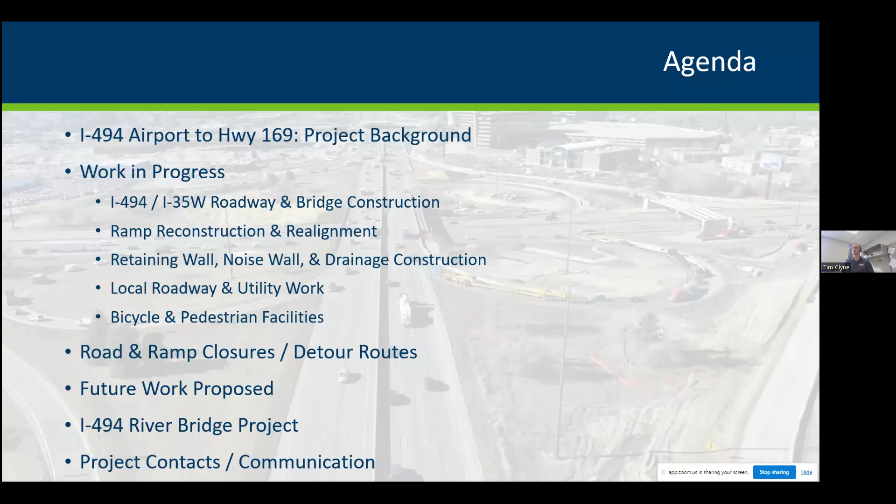Over the course of several years, after a lot of study, we've put together what's called the 494 Airport to 169 full vision. The ultimate vision, what we would like the corridor to look like, is basically to reconstruct or add an additional E-ZPass lane all the way from 169 to the MSP airport. That's about a 6-mile stretch, maybe a little more, 6 or 8 miles from 169 all the way to the airport.

The 35W interchange at 494 is one of the busiest, if not the busiest interchange in the entire state. It sees a lot of freight and commuter traffic, and it needs some improvements to help traffic flow better. And then there's access consolidation between 35W and 77.

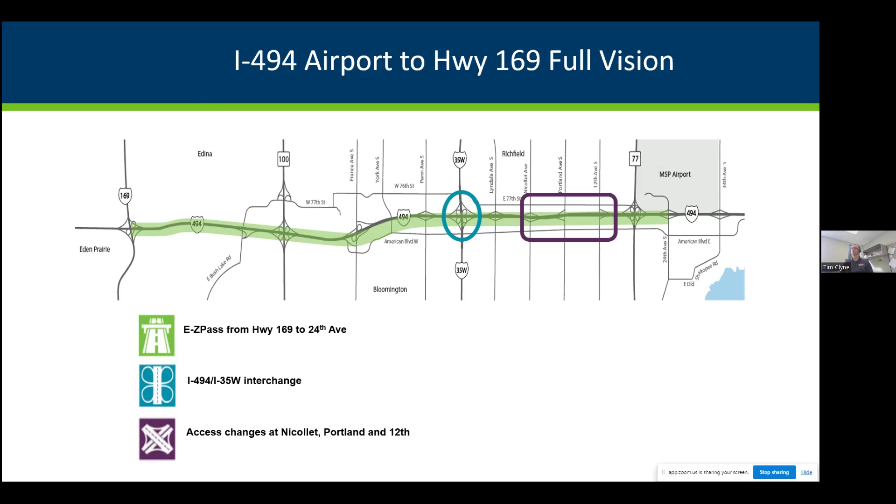So you can see that's a very large project. It's big. We can't do the whole thing in just one single project, so we're breaking it up into smaller chunks. The current project is by far the largest chunk of that full vision that we're going to do, but we're calling it the 494 design build. That's just the contracting method that we use to build the project.

So the scope and the schedule, what we're planning on doing - we started the project last year already, in the spring of 2023.

From now through the fall of 2025, the goal is to build the E-ZPass lane with full reconstruction from just west of Highway 100 to the 35W interchange. That's basically a 3-year process to rebuild the main line there.

Also in that same timeframe is to reconstruct the interchange at 35W and 494. And also this year, in 2024, we are building a pedestrian bridge at Chicago Avenue that crosses 494 and allows access for the communities on both sides of the interstate.

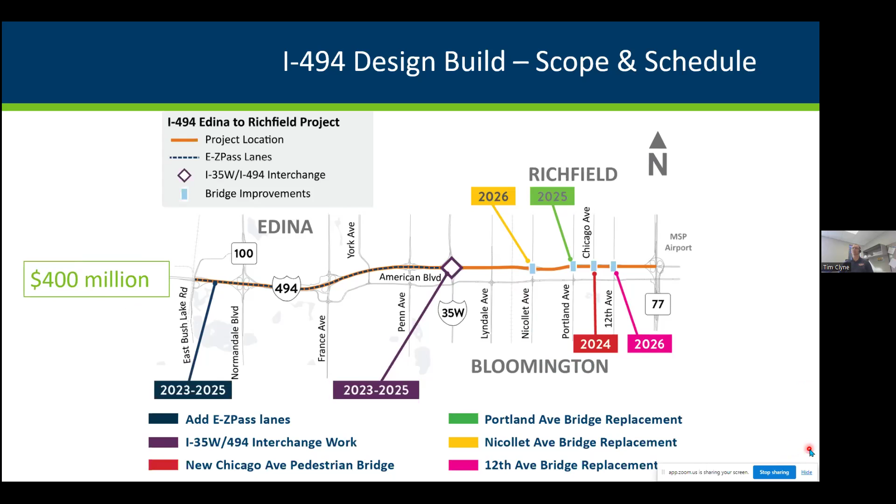The major benefit of this project, and really of the full vision, is twofold. At the top is improving safety and improving traffic flow, or reducing congestion. There are a lot of ramps merging and traffic merging on and off the freeway, so if we can consolidate or reconfigure the interchange geometry in some places, that will help traffic flow a lot smoother, which in turn improves safety.

Also, our interstate system is about 60 years old. It was built in the late 50s, early 60s, and roads and bridges just get tired and need some rework to get a smooth road surface again, as well as improved drainage. The drainage system has been improved over time, but we still get significant rain events and can have flooding on I-494, which is generally not a good thing. We don't like to close the interstate when it floods. So we're going to improve that.

And there is also, especially on the east side, east of 35W, but the west side as well, a lot of improved bike and pedestrian facilities to improve accessibility.

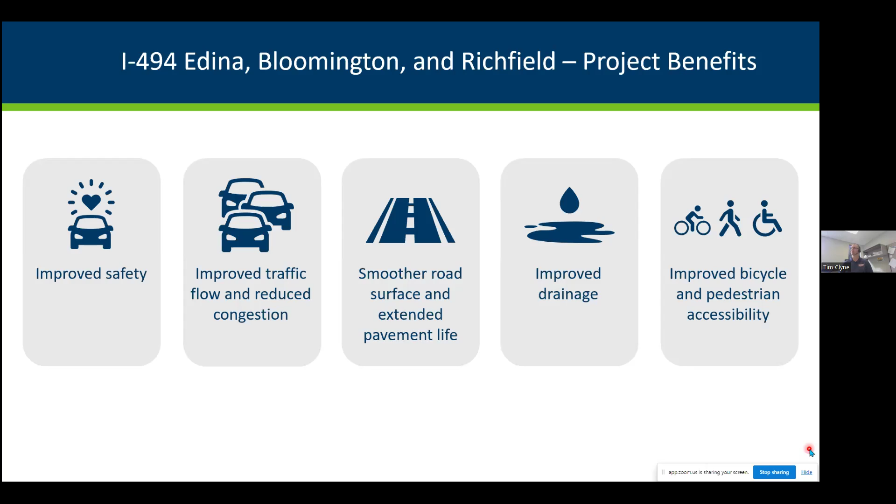One of the centerpieces of the project is the turbine ramp at 35W. Right now, pre-project, you have the entrance loop to northbound 35W, as well as the exit loop to go westbound on 494, and there's also the entrance ramp from 82nd Street. That's a lot of traffic all jockeying for the same position, and there's a lot of merging and congestion that happens.

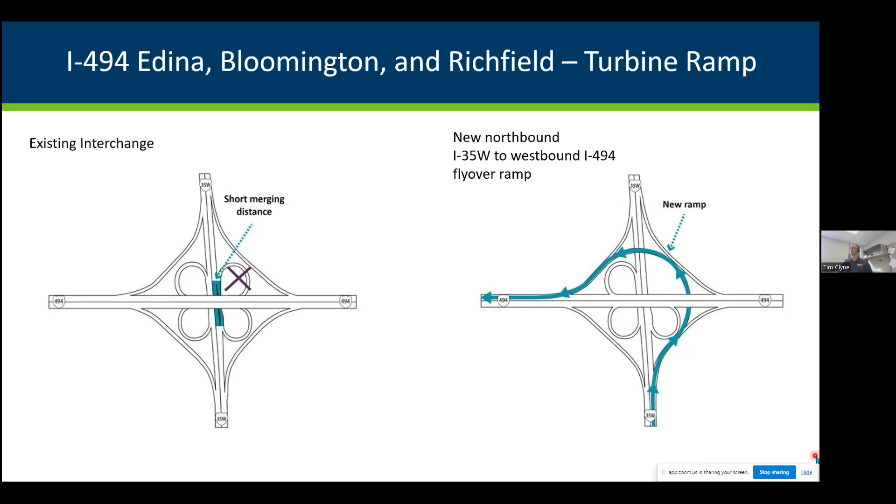We are eliminating this loop ramp here and instead building what's called a turbine ramp—call it a flyover. It's basically a more circular shape. Northbound traffic wanting to go westbound on 494—this is the heaviest movement of that whole interchange—so we're building a separate ramp. It goes underneath 494 through here, then climbs up and over this new bridge we finished earlier this spring, comes around, and eventually merges onto westbound 494. That's one of the highlights of this project that's underway.

So I'll start with some fun facts. I'm a numbers guy, I'm an engineer, I like numbers. So just kind of the project by the numbers.

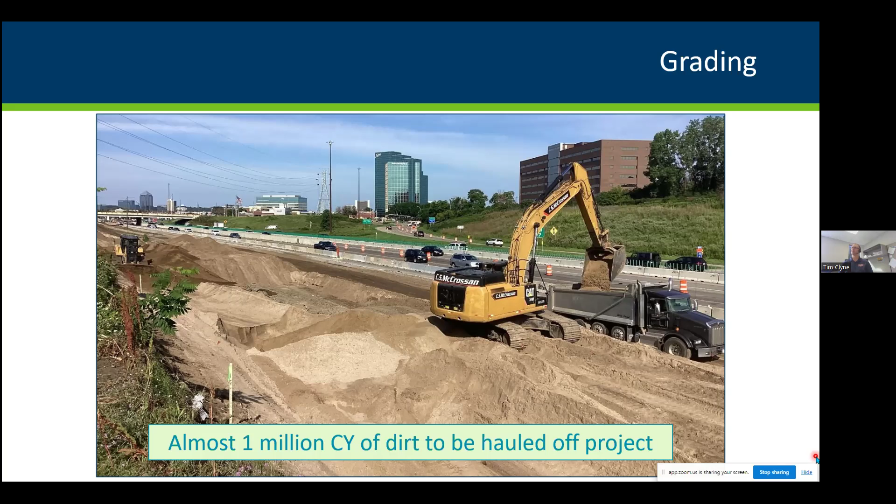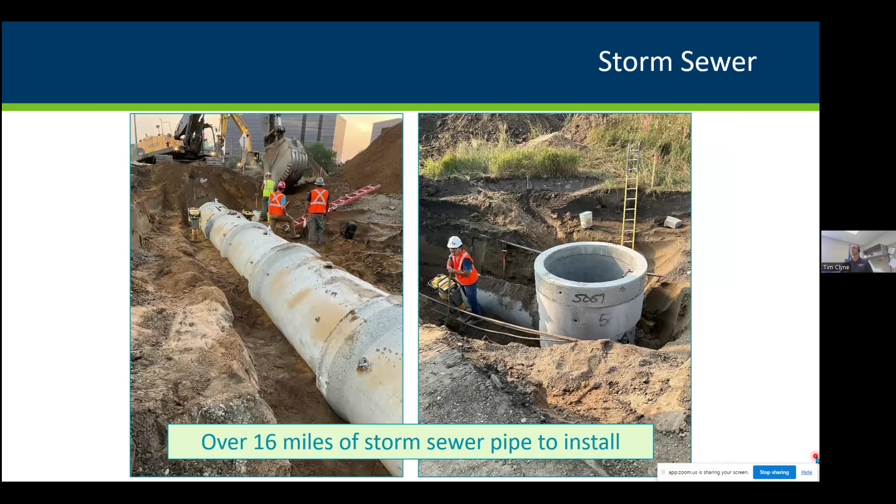If you've driven through the project, there's a lot of dirt to move—almost 1 million cubic yards of dirt that need to be scooped up, put into trucks, and hauled off the project and disposed of elsewhere. We are installing over 16 miles of storm sewer pipe throughout the project to alleviate flooding issues, along with all the catch basins and things that go along with it.

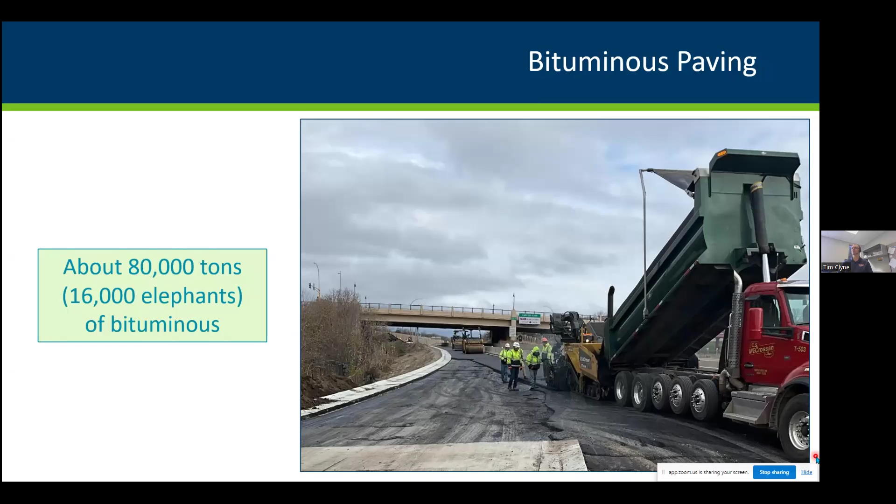There's about 80,000 tons of asphalt paving to do on the job. Some of it's temporary, just to move traffic, widening and crossovers, things like that. Some of it is permanent asphalt paving. That's about the weight of 16,000 elephants or so—just a fun way to think about how much asphalt is coming on the job.

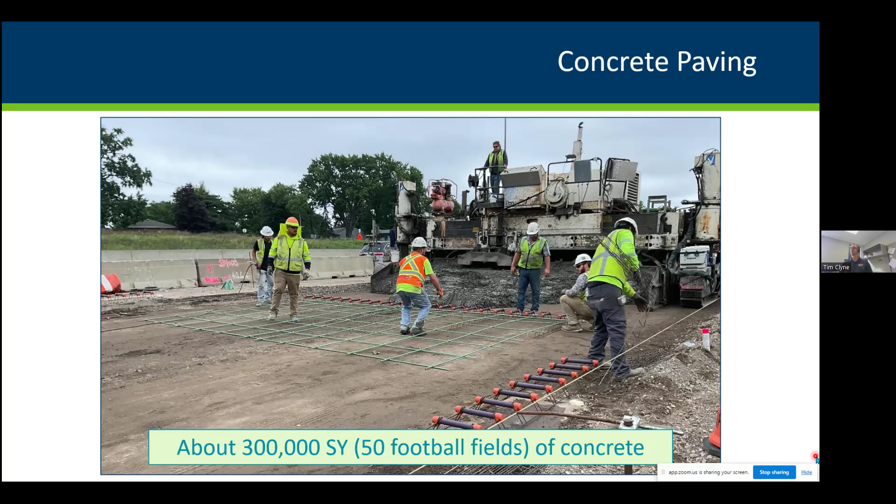Similarly, we have about 300,000 square yards of concrete paving on the job, basically all of Interstate 494. The new pavement will all be concrete. That's the equivalent of paving 50 NFL football fields with concrete. It's a lot of concrete work coming on the job.

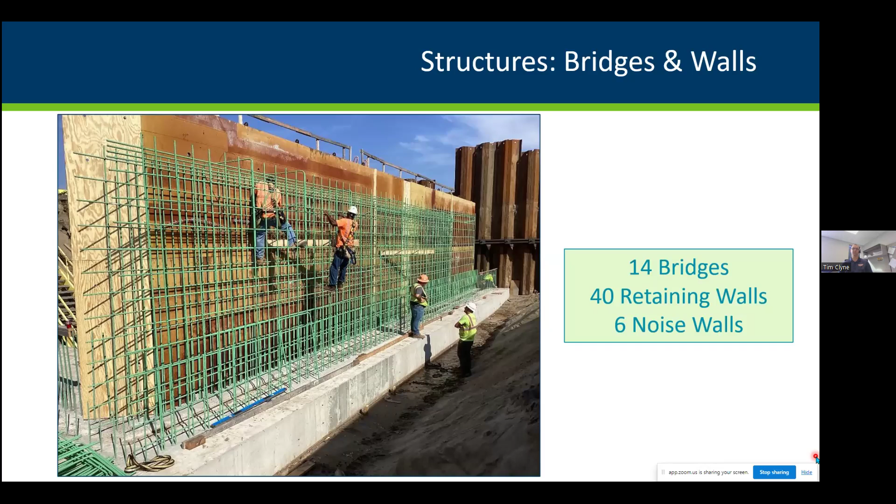So now I'll transition into showing you a view from above. We have drone photography that we take on the project about once a week or so. We actually took new drone footage yesterday, but I didn't get those photos in here yet, so these pictures are all from last week, pretty fresh. I'll generally start way on the west end and work my way east.

First picture starting west of Highway 100, you can see last year we reconstructed and paved this, eastbound, coming into the bottom of the screen here. That's complete, and we just recently paved westbound 494 between 100 and East Bush Lake Road up here.

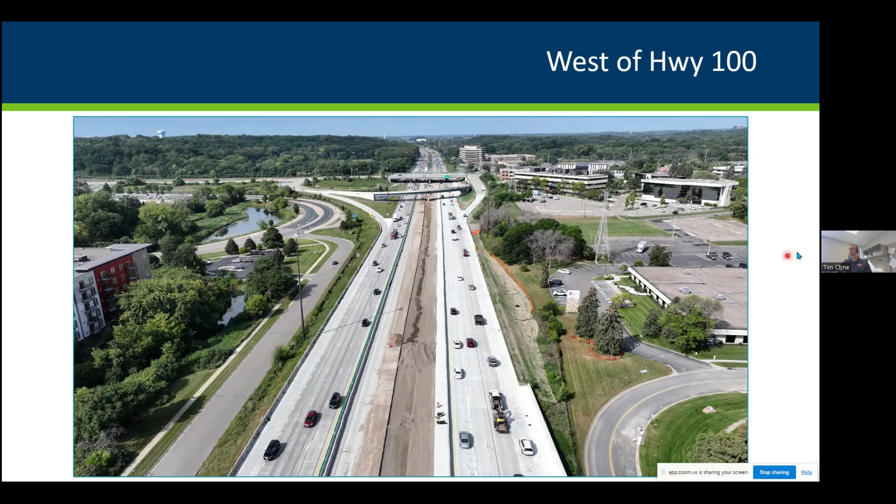Crews are currently finishing up grading in the median here. We have all the traffic pushed to the outside, so we're cleaning things up to get that ready to pave in the next month or so. Concrete median barrier will go in, drainage, overhead sign structures, things like that. That work is progressing and should be on track to be done later this fall.

Turning the other way from Highway 100, now looking east, so the top of the screen is east, west is at the bottom here. This year we are reconstructing pretty much all of 494 eastbound from Highway 100 to 35W.

This is American Boulevard, a local road that runs the whole length of the job, but specifically between 100 and France has been closed for a good majority of the season. We recently opened that up a couple weeks ago to two-way traffic.

We still have drainage work that we're completing on 494, and getting the grade ready to do some paving here either later this month or into early October. That work is still ongoing, and we had about 3,000 feet of retaining wall that we had to take out in order to widen the road to add the EZ pass lane.

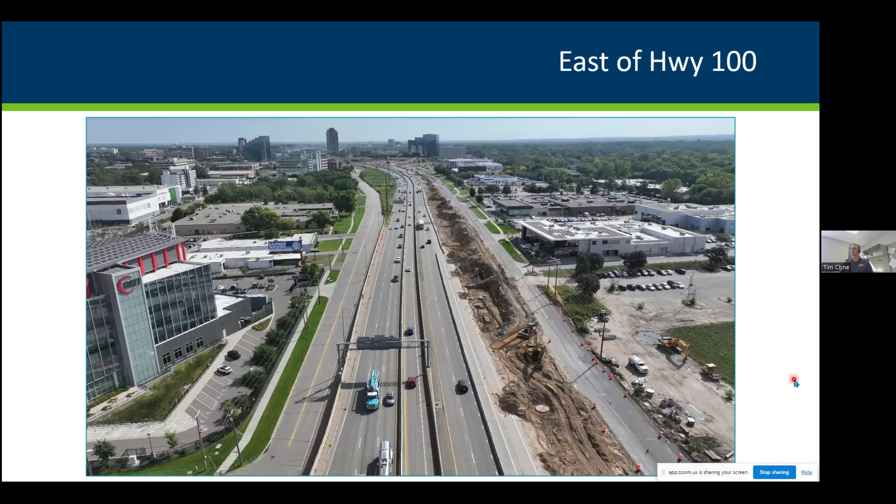Similar shot from the southeast corner of Highway 100, looking again at American Boulevard here and where it intersects with Normandale Service Road, the frontage road. In the past, this Normandale service road was the through movement. Now we've reconfigured the intersection so that American Boulevard is the through movement. If you want to take the frontage road, you'll have to turn onto this.

We have the northbound Highway 100 to eastbound 494 ramp closed right now while we reconstruct that. Doing grading, drainage work is just about there. We're getting ready to build this barrier system, like a retaining wall, to replace the retaining wall that we took out earlier this year.

There have been a lot of local businesses along American Boulevard inconvenienced by the road work, Cyrus Rugs in particular, but also a Mercedes dealer, several other car dealers, an Olive Garden, and apartment buildings as well. But we got traffic open again to try and restore business access for those folks.

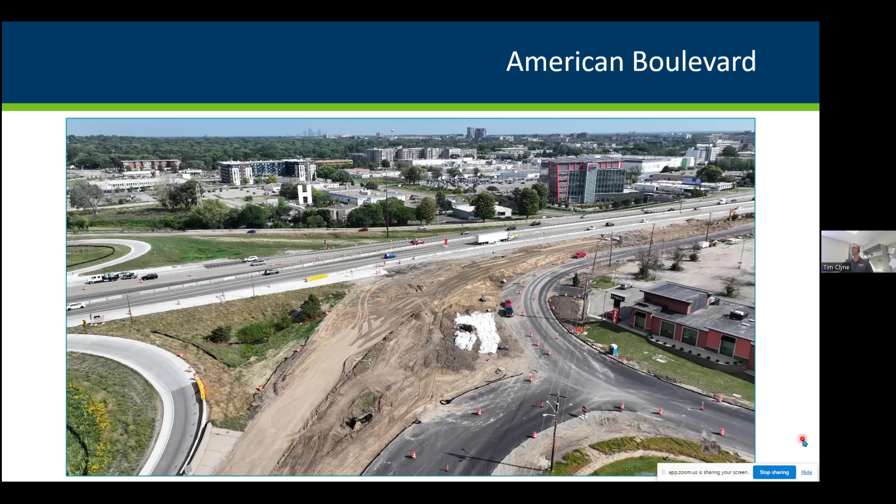Moving a little bit farther east, this corner here at the bottom right of the screen is American Boulevard where it turns up to France. This is the eastbound exit to France Avenue, and that's under construction right now.

We're just about ready to start building a retaining wall here. You can see some pipe laying on the ground getting ready to be installed. And this area here, you may have seen the large piles of sand and rock and this plant. All of the concrete pavement we're paving on this job is being produced at that plant right on site, which certainly helps with truck times and access to get that concrete material, the mixture, to the job site quickly.

This used to be a mound in the middle of the on-loop here, and we dug it down. It will now be a stormwater pond, so that work is in progress and the pond is just about ready. We're getting ready to start putting the road back together. Drainage is just about in, so we're putting sand and then gravel, getting ready to pave this stretch in the next couple of weeks.

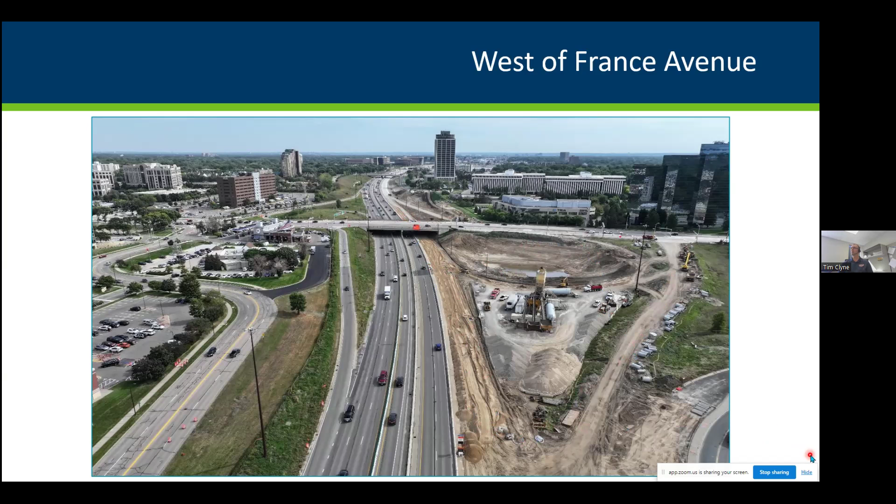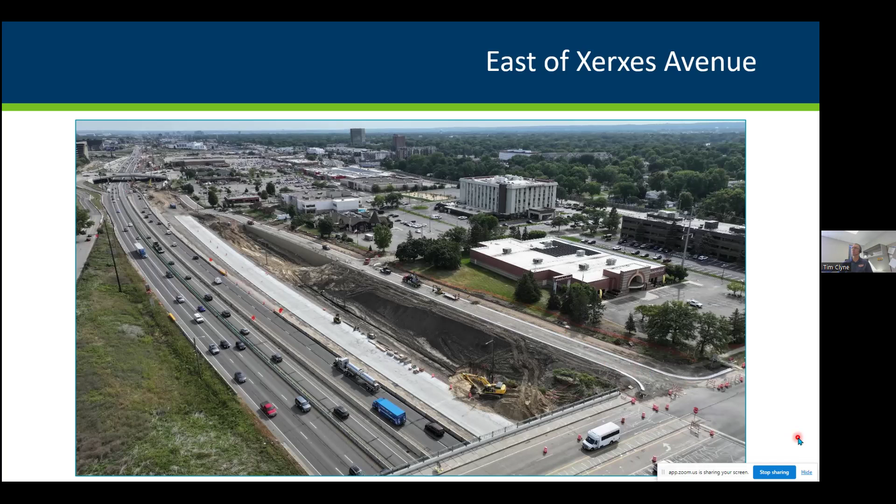Further east, looking at Penn Avenue now, continuing to look east. You can see there's another retaining wall that we built here on the south side of this exit ramp to Penn.

We are just about to kick off some significant work underneath the Penn Avenue Bridge. We've had a long history of groundwater problems, which has caused pavement failures and things. So there's a pretty robust solution there, but we're basically building a land bridge to carry 494 traffic underneath Penn Avenue. That work will be kicking off even later today or maybe tomorrow.

We also just yesterday set up traffic control to do some rehab work on the Penn Avenue Bridge itself. The bridge is only about 20 years old, built in the early 2000s, but needs some small concrete patches on the deck, and the sidewalks on either side will be redone as part of the project here. So that work is ongoing.

Just a little bit farther east, the on-ramp to eastbound 494 has been closed for most of the season here. We have fenced off here a deep drainage structure. Like I said, there's a lot of drainage, deep groundwater. We have a pump house or a lift station here that takes care of a lot of stormwater.

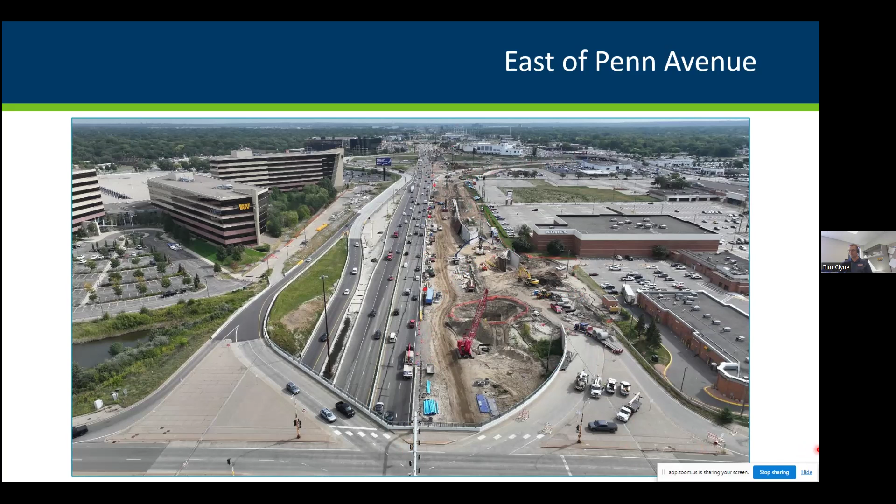Similar picture of the same area, just flipped around looking the other way. So here's Penn Avenue, here's the bridge that I was talking about, and we have retaining walls coming off of the bridge. You can see this is kind of the end of the turbine ramp that I'll show in the next couple of slides. We have a staging area, just places to lay down all the equipment and materials that we're going to use on the project.

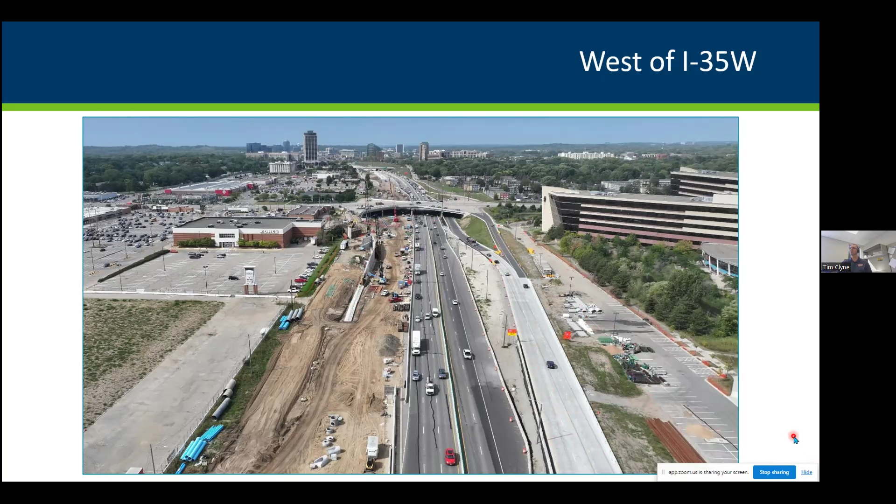This is a new bridge carrying 494 across 35W. We built the abutments on either side, built the pier earlier this year. We closed 35W overnight for a couple of nights to set beams across, and now we are just about ready to pour concrete on the bridge deck itself tomorrow night, Wednesday night.

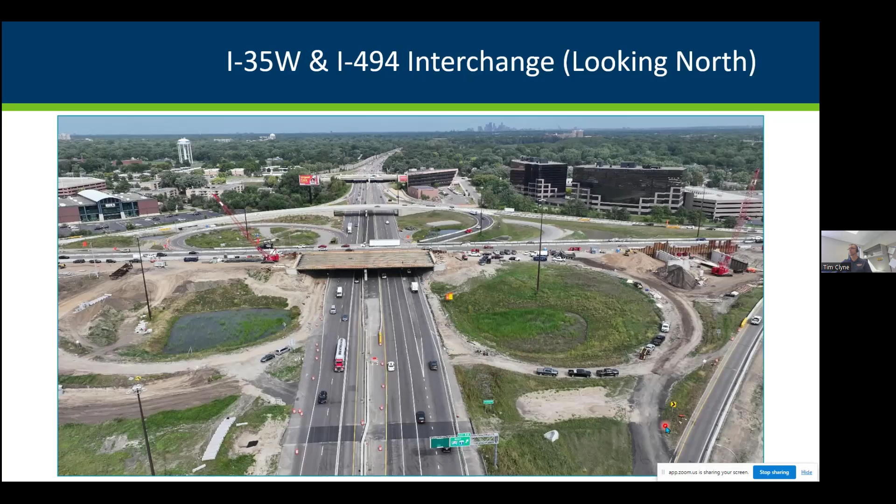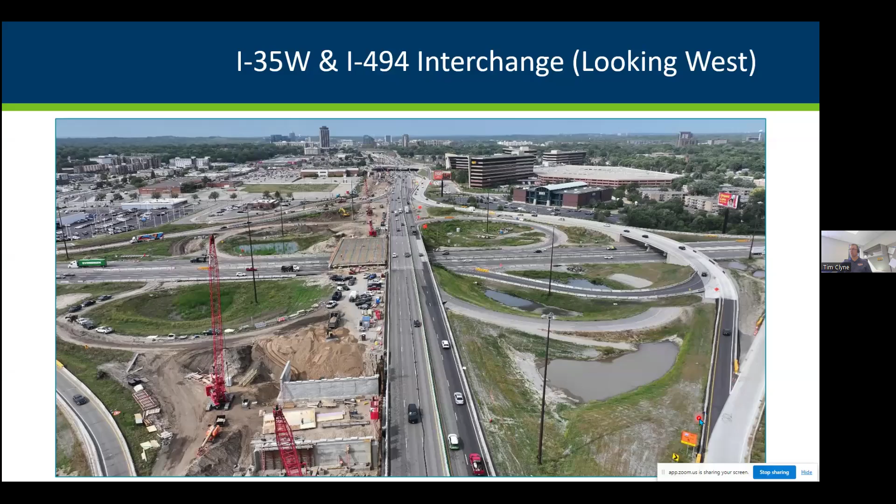So, traffic coming northbound on 35W is coming down to the bottom of the screen. Instead of taking the loop that used to be here, right now we have this temporary S ramp where you can get up onto the bridge and then merge onto 494 on the west side of the interchange.

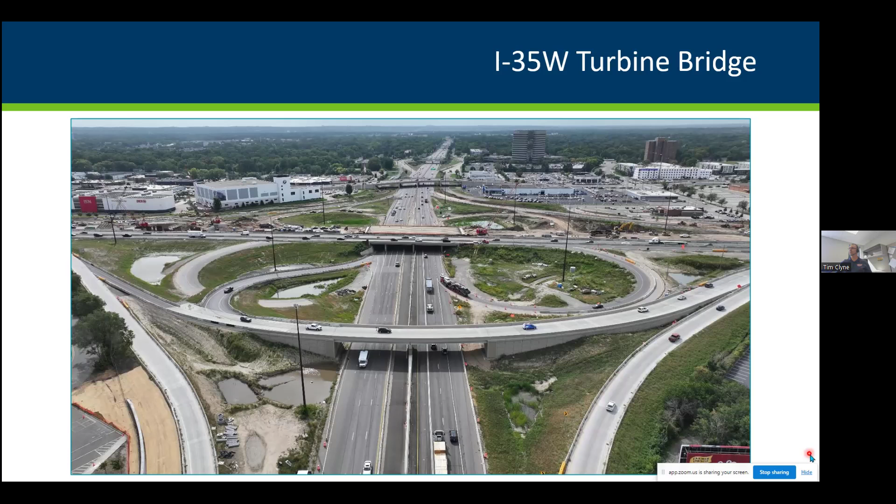Eventually traffic will exit 35W back here. It will go underneath 494 at this bridge I showed in the last slide, and then start to climb up and over and take this bridge across. Again, that eliminates all the weaving between these two ramps and gets traffic to flow a lot more smoothly, and a lot safer in the meantime.

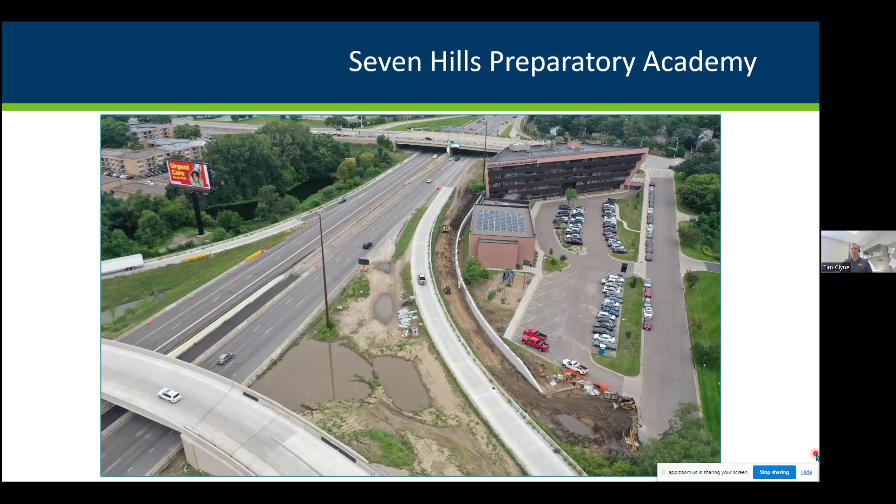Okay, continuing to move east from 35W. We've been working on this retaining wall on the south side the better part of this season. This frontage road used to be Clover Drive, so we closed it early this spring to build the retaining wall. We'll still be widening 494 by a lane.

So the retaining wall is holding up 494, and we're in the process of digging out. This is another stormwater pond that's going to hold stormwater at the end of the project. So that is underway and just about complete.

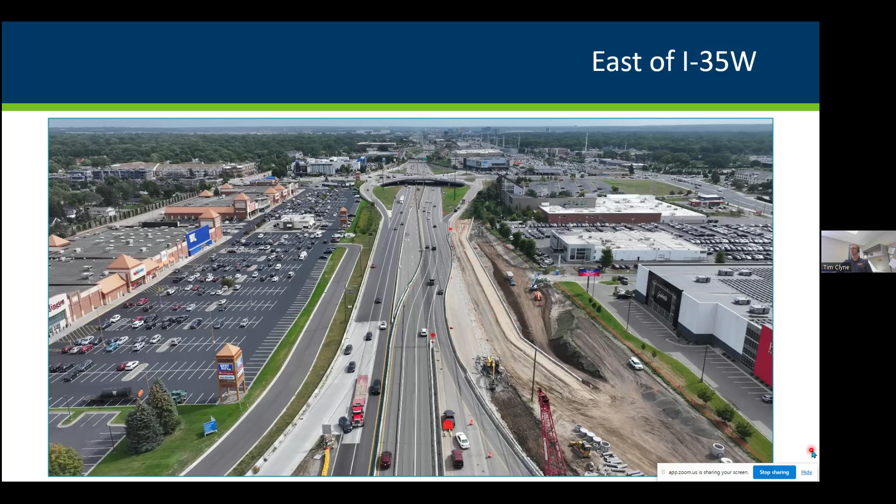And then towards the east end, we haven't done much on the east end of the project last year and this year, but starting to a little bit. This is Walmart on the south side and several apartment complexes on the north side. There are other businesses over here too. A lot of people like to access or want to go across 494.

So we are in the process of building a bridge for pedestrians. Here on the south side, we've put up the abutment. We're working on the abutment on the north side. In another month or so, we're going to put up the truss that carries the pedestrian traffic, and then start to work on retaining walls, which carry the ramp back to the intersection at Chicago Avenue here.

So that's been a pretty major undertaking, to realign East 78th Street, both on the south side and the north side of 494. But some of this is removed completely because the pedestrian bridge, and then a new exit ramp to Portland Avenue and new entrance ramp to Portland, are coming on. We've had drainage work, utilities with water main and sanitary sewer, and things like that. So a lot of work here just to improve pedestrian facilities on the east side of the project.

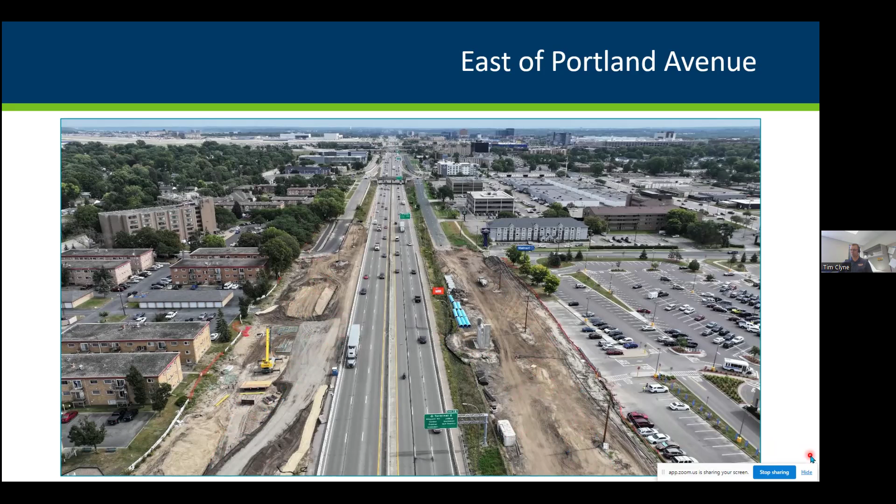Okay, so that's kind of an overview of all the work that's been done and is being done to date. If you're tuning in, you're probably aware of the traffic impacts we've had. You obviously can't build such a large project without impacting traffic in some ways, but we do the best we can to try to maintain access for people and have people be able to get where they're going. So over the course of this construction season, we've been working on 494 all the way from East Bush Lake Road over to 12th Avenue about.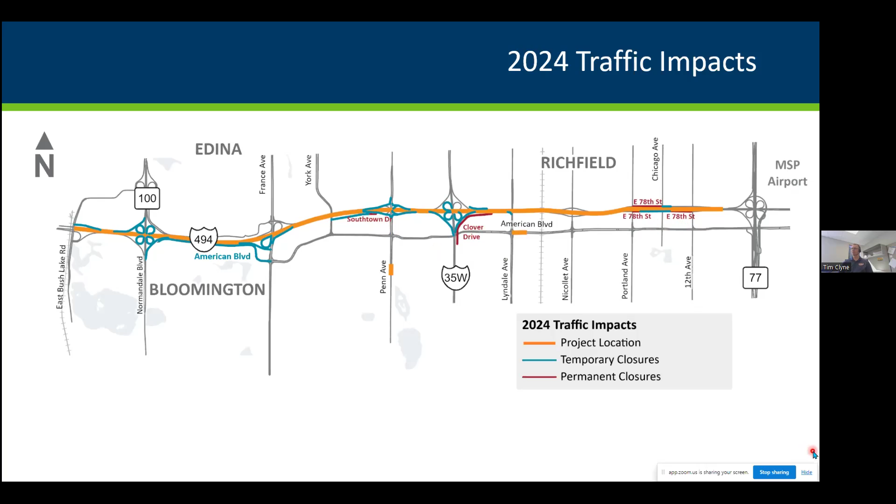We understand there are a lot of traffic impacts. We've had frequent lane and ramp closures overnight throughout the season. Construction work is inherently noisy. We do the majority of the work during the day when the construction noise blends in with the regular ambient traffic noise. Some of the noisy work—jackhammering, saw cutting, pile driving for bridges—we try our best to do during the day. There's been a few times we've had to do that work overnight, but we try to limit the noisy work to daytime hours.

We're getting close—it's kind of scary. October starts next month, and by mid-November, we plan to wrap up everything you just saw that was wide open. It'll be paved, and traffic put into its winter configuration by mid-November.

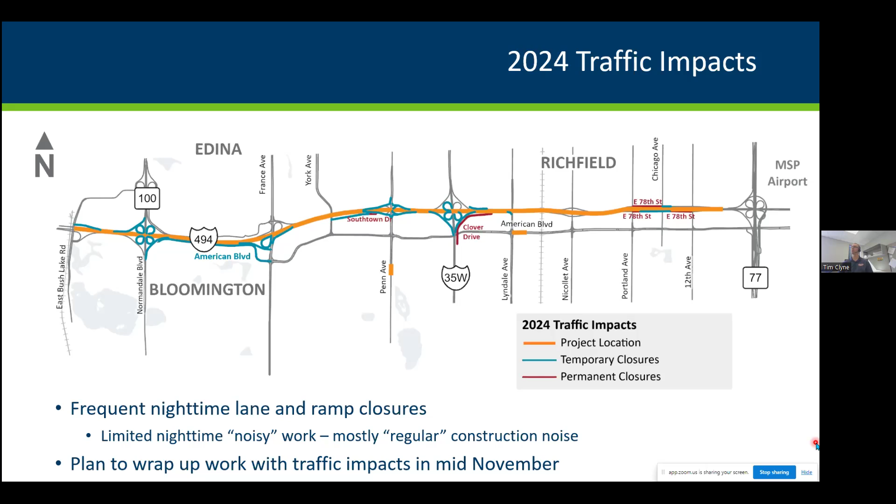Along with that, we've had a couple of full closures of both 35W and 494. 35W was closed last Friday night—we closed northbound 35 for mill and overlay of the bituminous pavement north of 494. It was just old and beat up, so to make traffic flow more smoothly, we did that work, and to set the beams on the bridge carrying 494 across 35W. That happened a couple of weeks ago.

And again tomorrow night, we are closing both directions of 35W at 494 to pour the concrete bridge deck.

In October, we have a couple of weekend closures coming up for a variety of activities—some drainage work, some temporary and permanent paving work, and to set that pedestrian bridge truss and get it up on the abutments. October 11th to 14th is the first weekend set to close both directions of 494 between Highway 100 and 35W. Then we're skipping MEA weekend—no full closures over MEA weekend.

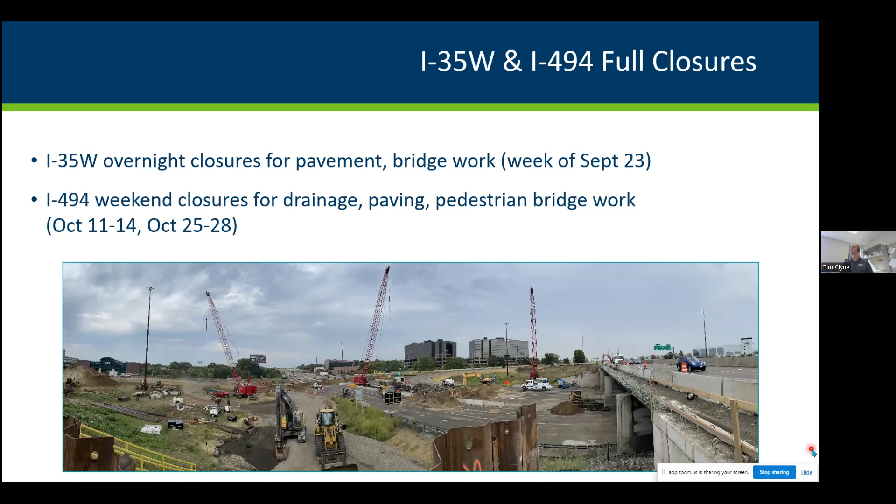Once we get through the end of this season, there's a lot of work yet to do at the end of this season, but we'll get through that.

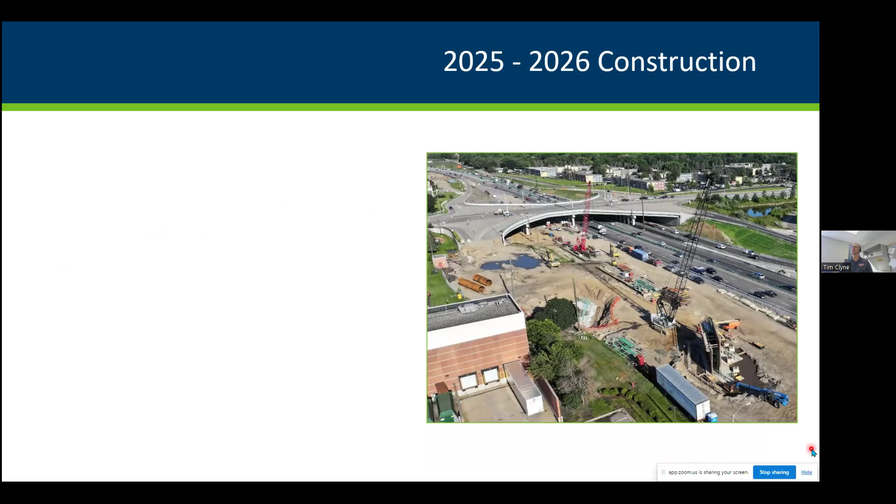Work that's coming up in the next 2 years: basically, everything you see going on eastbound 494 this year is a mirror image of that same work going westbound. So we will reconstruct westbound 494 from Lyndale to Highway 100. By the end of this season, we should be done with all of the work west of Highway 100, so we shouldn't be getting into that interchange anymore next year.

We will also, by the end of next year, have the interchanges at 35W and at 82nd Street complete—all of the bridges built and all of the traffic moved where it needs to be. Also next year, we will reconstruct the Portland Avenue Bridge across 494 and have that full access interchange with all 4 on and off ramps complete by the end of next year. Then in 2026, we'll have the Nicollet Avenue Bridge and the 12th Avenue bridges that cross 494 reconstructed, and we will do all the electronic work to turn on and complete the E-ZPass system.

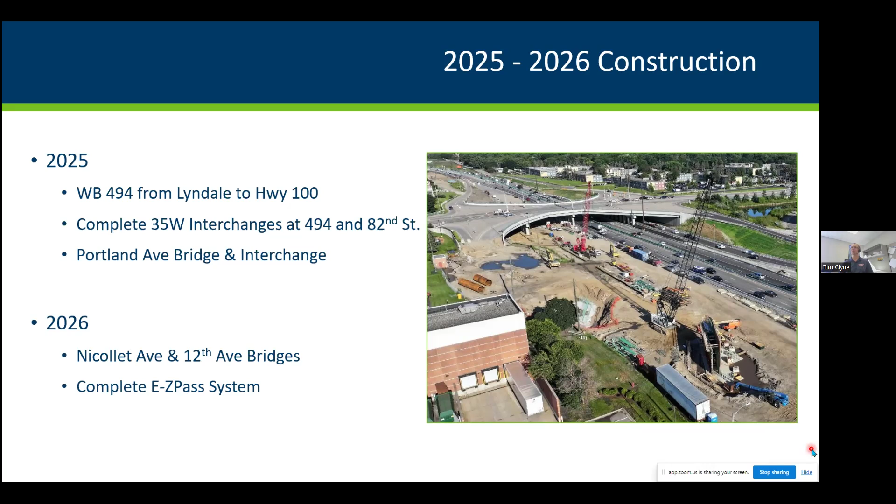Just a little more on traffic impacts next year: we'll again have some more full weekend closures of both 35W and 494 to remove and then replace the westbound 494 bridge over 35W, and to remove and then replace the Portland Avenue Bridge over 494. So we'll have a few weekend closures coming again that will be coordinated and advertised throughout the area.

We anticipate having Portland Avenue closed the entire season between American Boulevard and 77th Street. There are a lot of local businesses there, so we will always maintain access to and from those local businesses. It might be a little different from where they're getting in now, but we'll maintain access. And before we close Portland Avenue, the Chicago Avenue Pedestrian Bridge will be open, allowing people to make that movement across 494.

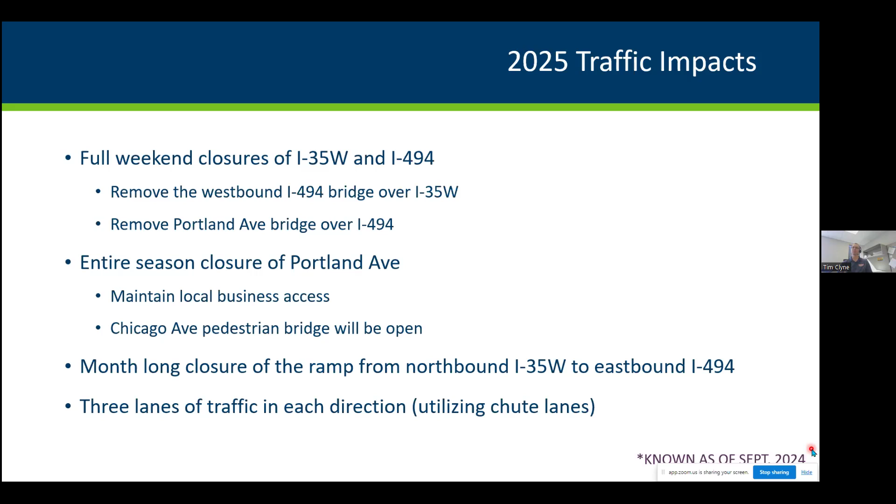There are some longer ramp closures at 35W, and we're still going to maintain 3 lanes of traffic in each direction, but sometimes one direction might be in a chute lane on the other side of the highway.

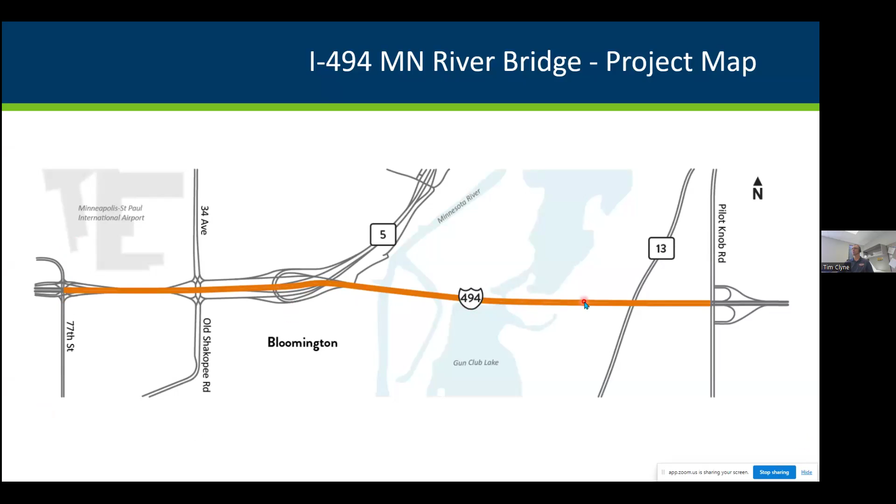I have a couple slides at the end here. Our project is mainly the design-build job from Highway 100 to 77, but MnDOT is also repairing the bridge across the Minnesota River, just east of the airport and just east of this project. It goes from 34th Avenue, right in front of the Mall of America and the airport on the north side, past the airport across the Minnesota River to Pilot Knob Road on the east side.

It's mainly a bridge and pavement repair project. The bridge is getting worn out and has some needs that need to be rehabbed, along with improved safety and accessibility for pedestrians at some of the intersections and interchanges, and some drainage work.

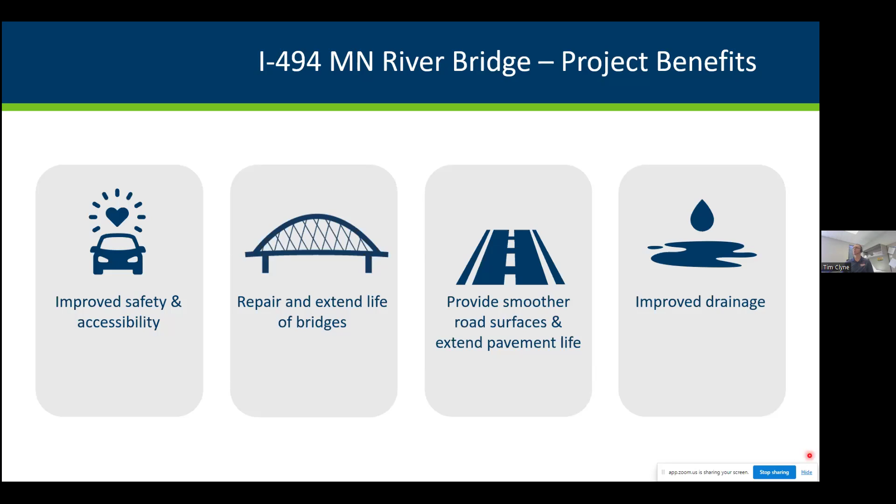This is similar to the work you've seen this year on the project, just flipped around on the other side next year. There will be lane and ramp closures throughout the project area. This year, crews have been working on the westbound bridge over the river, so traffic is reduced to 2 lanes in both directions on the eastbound side. Next year, we'll flip traffic, putting 2 lanes in each direction on the westbound bridge that will be newly repaired, while crews work on fixing the eastbound bridge.

A few significant ramps will be closed for the better part of the season: westbound Highway 5 to eastbound 494, and the 34th Avenue entrance ramp to eastbound 494. Those will be closed for a majority of the season just to safely do the work. The eastbound bridge also carries a regional trail across the river, and that trail will be closed from May to November to complete the work.

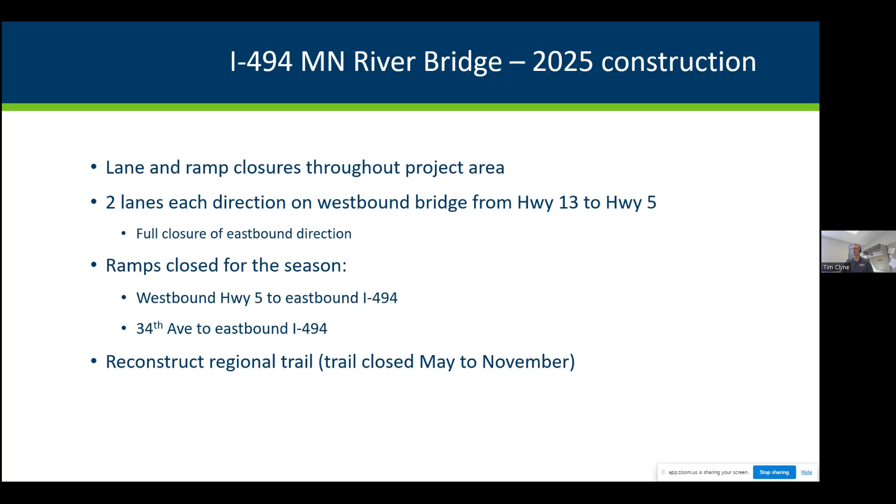So I will stop there, take a breath, and entertain any questions that you might have.